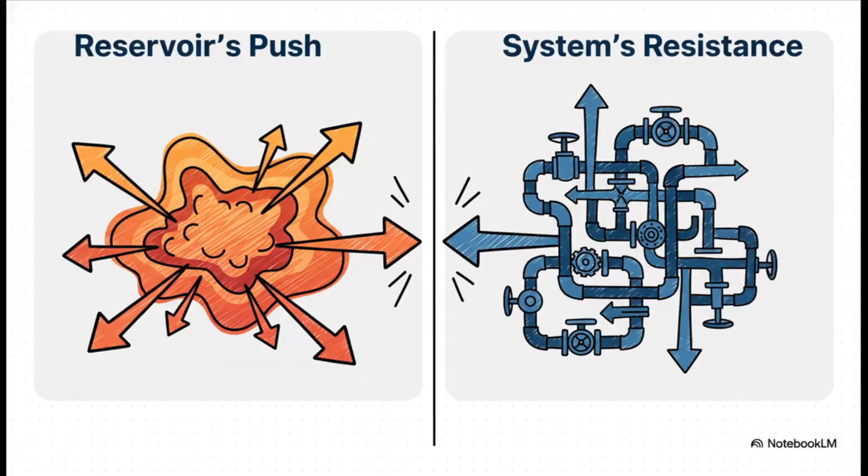Now, to really wrap our heads around that system resistance, we've got to follow the oil on its pretty epic journey, right? I mean, from deep underground all the way to the processing facility. Every single step along this path adds a little bit more of that resistance. So, where does it start?

Well, the journey kicks off in the reservoir's porous rock. From there, it flows into the main wellbore. And then it's got to travel thousands of feet straight up through the production tubing. Once it hits the surface, it zips through a flow line and finally, it reaches the separator. That's where the oil, gas, and water all get split apart. The key thing to remember here is that each of these stages is just one piece of a single, continuous system.

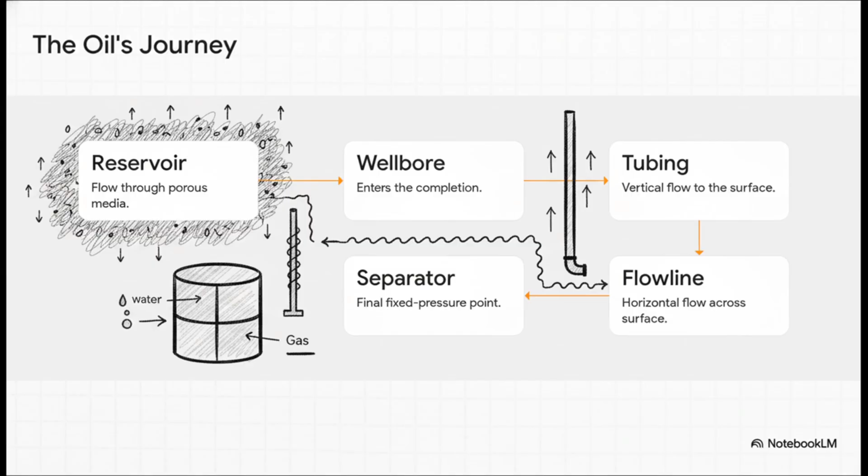Okay, so what's really fascinating about this whole trip is this idea of pressure loss. The best way to think about it is like an energy cost or a tax. As the oil squeezes through the rock, climbs up that long pipe, and navigates around bends, it loses energy. It's just friction, right? This pileup of pressure loss is the total resistance that the reservoir has to fight against and overcome.

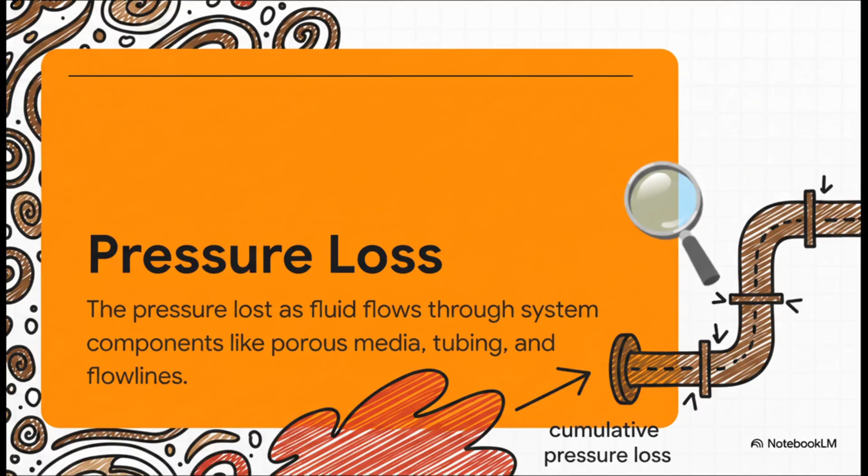So, with all that pushing and resisting, how in the world do engineers figure out the exact point where the reservoir's push perfectly matches the system's resistance? Well, they use this really elegant method called nodal analysis. It's basically a way to solve this pressure puzzle on a graph and find the well's natural sweet spot.

Okay, first let's look at the pressure the reservoir can supply. This makes a curve that goes downwards. Now, I know that sounds a little backwards, but think about it. The faster you try to pull fluid out, the higher your flow rate, the more the pressure right around the wellbore drops. So yeah, the available push from the reservoir actually gets weaker the more you flow.

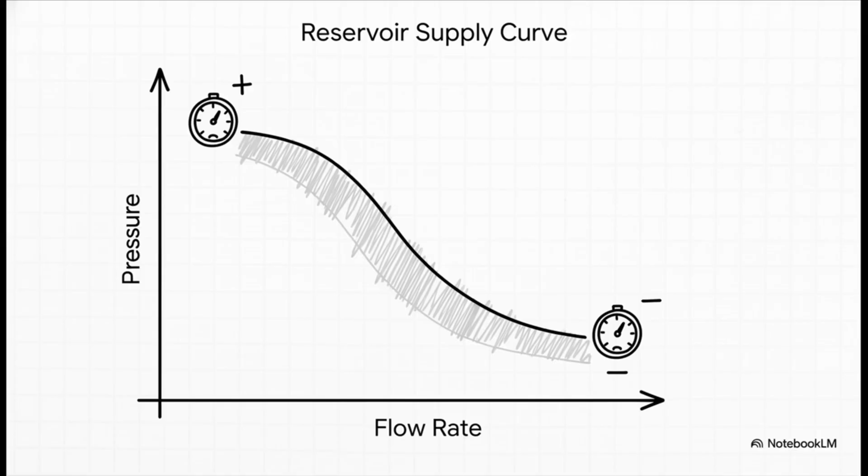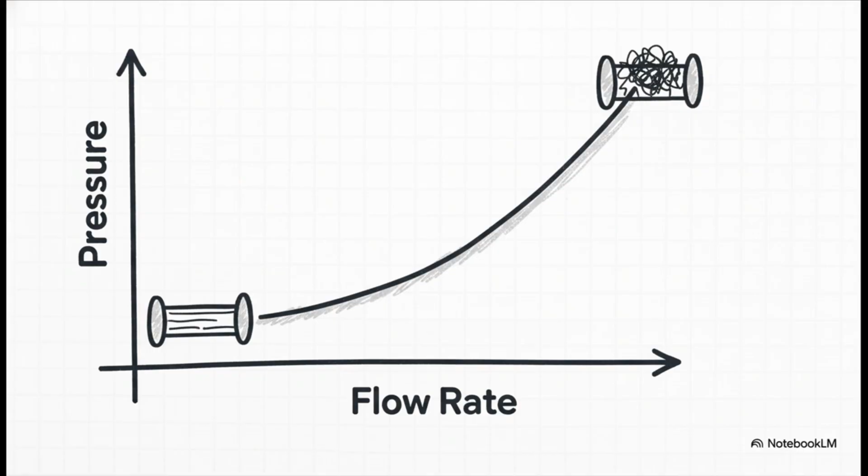And now for the other side of the coin, the opposing force. This is the pressure you need just to push the fluid through all those pipes and all that equipment. And this curve, it goes up. The logic here is super simple. The more fluid you try to cram through a pipe, the more friction you get, and so the more pressure you're going to need to do it. The resistance gets stronger as the flow gets higher.

So here's the magic moment. When you plot those two opposing curves, the one going down and the one going up, on the very same graph, they're going to cross at one and only one point. And that intersection, that is the well's natural flow rate. It is the only place where the pressure the reservoir can supply exactly equals the pressure the system requires.

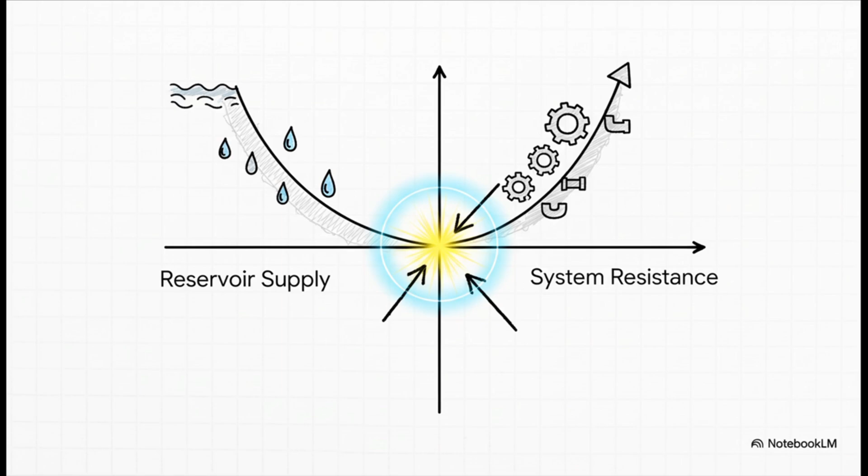The system literally can't flow at any other rate. That's its equilibrium. Okay, so we've got our method, right? But here's a really interesting question. This whole production system is just one long continuous path. So what happens if we decide to place our node, our measurement point, at different spots along that path? Do we actually get a different answer depending on where we choose to look?

Well, the source material gives us a huge clue here. It says, and I'm quoting, "The choice of node depends on which system component is being evaluated." So choosing where to measure, it's not random. It's actually a strategic decision an engineer makes depending on what part of the system they really want to dig into. Let's put this to the test with a real example from our source material.

First up, we're going to place our node way down at the bottom of the well. This is the classic standard approach. What it does is it splits the problem perfectly in two. You've got everything happening inside the reservoir on one side versus everything happening in the pipes going all the way up to the surface on the other.

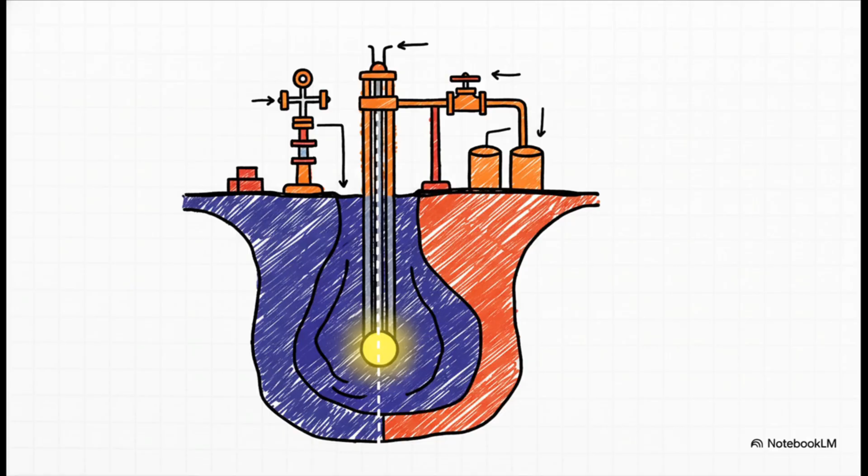So we run the numbers. We plot what the reservoir can deliver to that point against what the tubing and all the surface gear require from that point. The curves cross and boom, the solution is a production rate of 900 barrels of oil per day. Okay, lock that number in your head, 900.

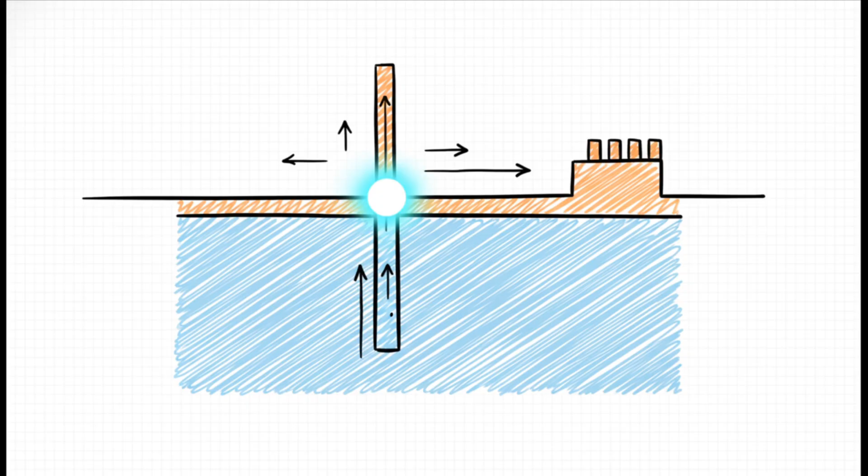All right, now let's completely shift our perspective. We're going to move our node all the way up to the wellhead, right there at the surface. This splits the problem in a totally different way. Now we're comparing what the reservoir and the vertical tubing can deliver to the surface against what the surface flow line needs to move it from there.

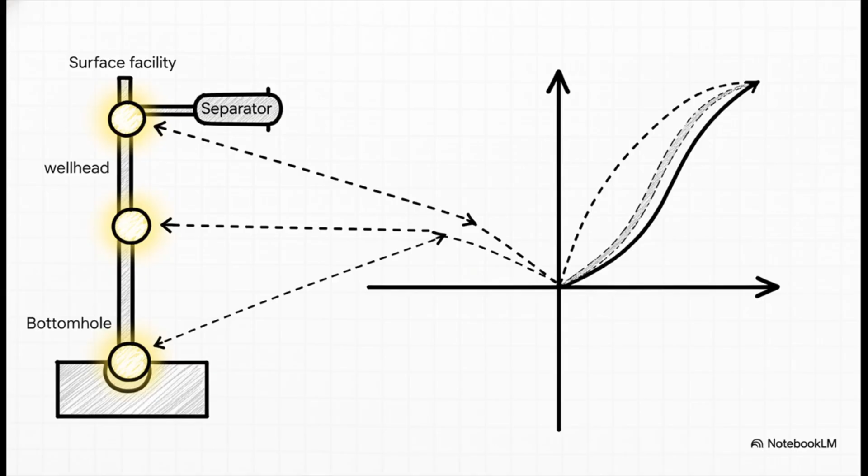Okay, so we run the new calculations from this new viewpoint, and what do we find? You guessed it. The intersection gives us the exact same flow rate, 900 barrels of oil per day. And this just brilliantly drives home the core principle. It doesn't matter if you analyze from the bottom of the well, the top of the well, or even right at the final separator. The answer is always the same, because a physical system like this has one and only one balancing point. The math is just confirming the physics of the real world.

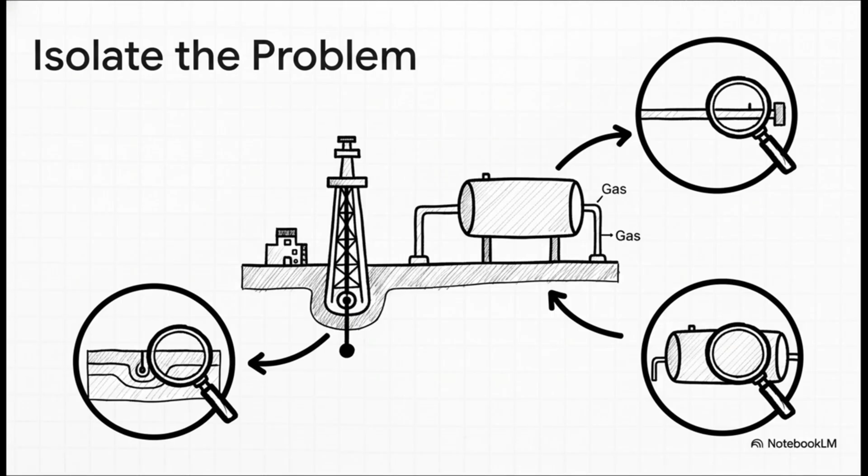Okay, so this naturally leads us to the most important practical question of all. If you always get the same answer, then why would an engineer ever bother choosing different nodes, right? Why not just stick with the standard bottom hole method every single time? And the answer is because choosing a node is an incredibly powerful diagnostic tool. By placing the node at a specific spot, you can isolate one part of the system to see how different changes might affect everything else.

For instance, you want to see how the well will perform as reservoir pressure slowly drops over the years? You focus on the bottom hole. Or maybe you're thinking about installing a bigger, more expensive flow line on the surface. We place the node at the wellhead. That lets you change just that one variable and see exactly how it impacts the whole system's performance.

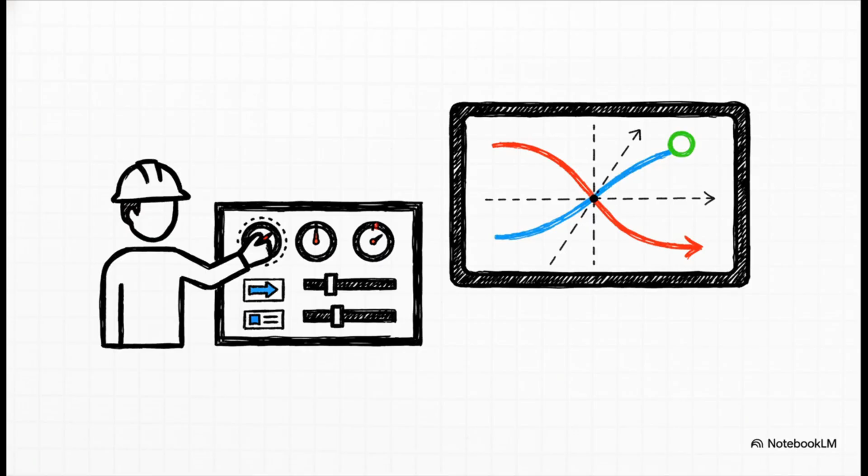So here's the big takeaway. Nodal analysis isn't just some fancy calculator for predicting a well's flow rate today. Its real power is as a what-if machine. It lets engineers model all sorts of changes, diagnose bottlenecks, and really optimize the entire production system to squeeze out every last drop as efficiently as possible.

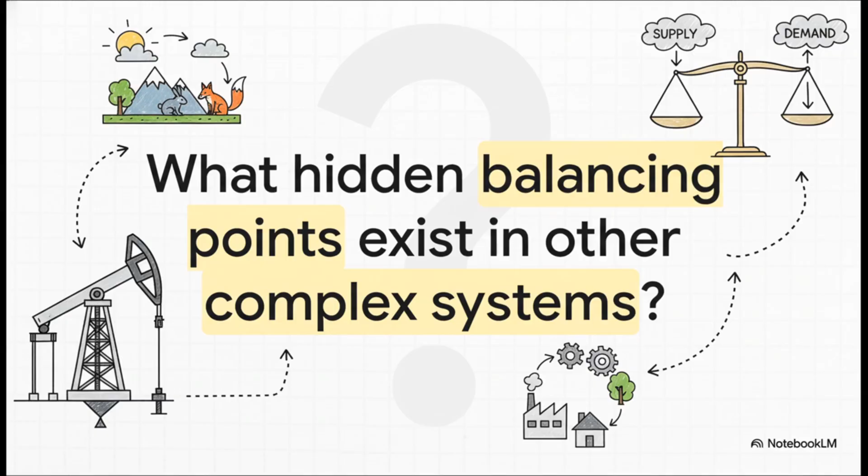It's really just a method of breaking down a super complex problem by finding that one single point where what's available meets what's required. And it kind of makes you wonder, doesn't it? From economics to ecosystems, what other hidden balancing points could we find in all the complex systems around us if we just knew where to look?